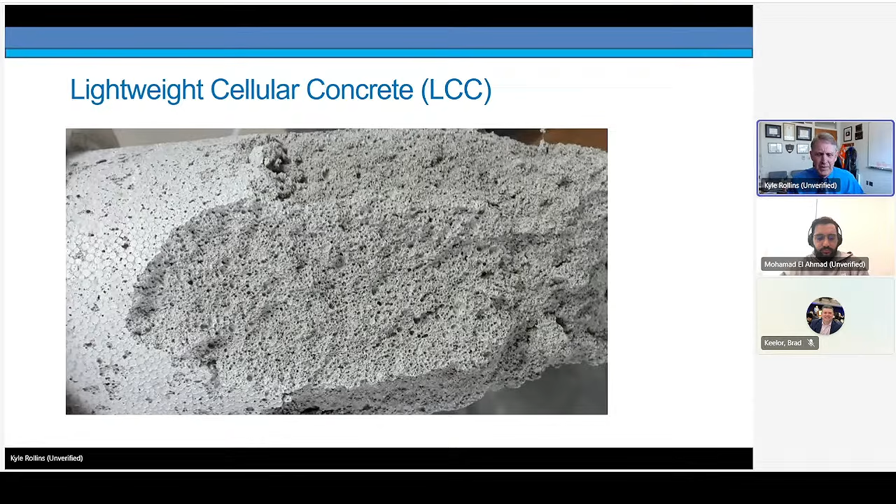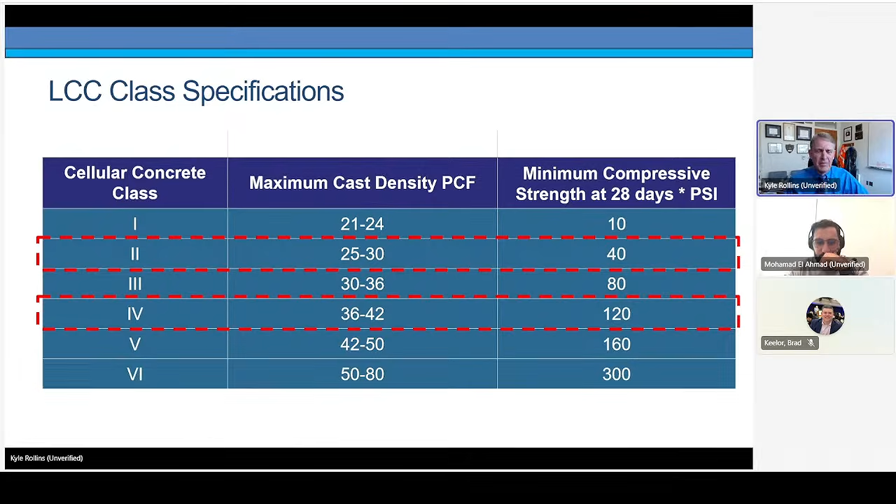There are different classes, and the material we're going to primarily be dealing with is class 2 concrete that has a maximum cast density of between 25 and 30 on average, with a minimum compressive strength at 28 days of 40 psi. Class 4 might also be useful if you're trying to produce a wearing surface that won't be as susceptible to deformation as class 2.

There are a number of benefits for using lightweight cellular concrete, LCC. One, of course, is the lightweight, and this naturally reduces the settlement you have to deal with, particularly where there's critical structures where you're trying to construct. You can also look like a superhero and lift these great big blocks of concrete that only weigh about 20 or 30 pounds, right?

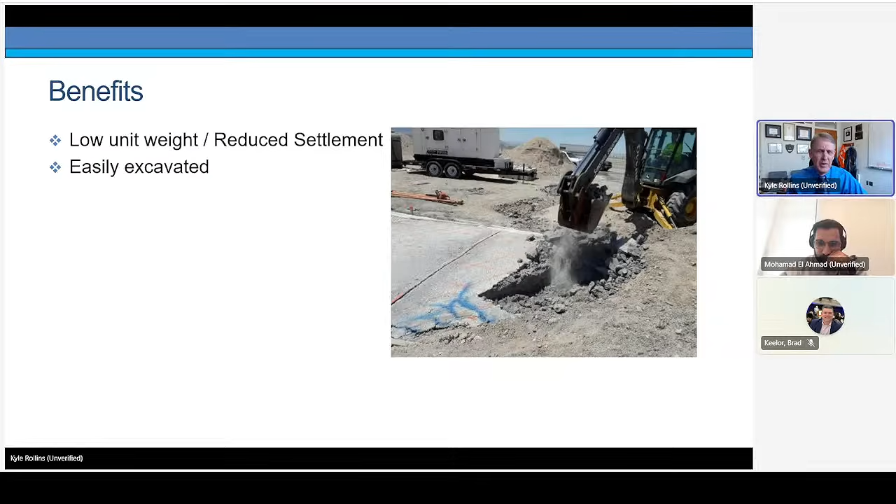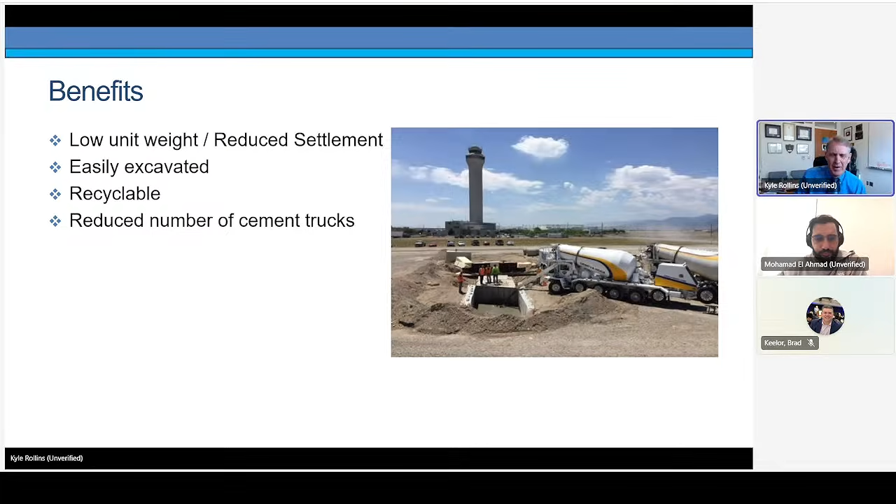Another selling point is it's easily excavated. So if you need to get under that fill material, you can do so with a backhoe without too much trouble. It's recyclable. You can roll over it and it goes back down to cement powder, basically. There's a reduced number of trucks that you have to provide because you're not dealing with all the aggregate that has to go in normal concrete. It's easy to place. You can see how they're pumping it into a project here at the Salt Lake Airport. It has good flowability. It's self-leveling.

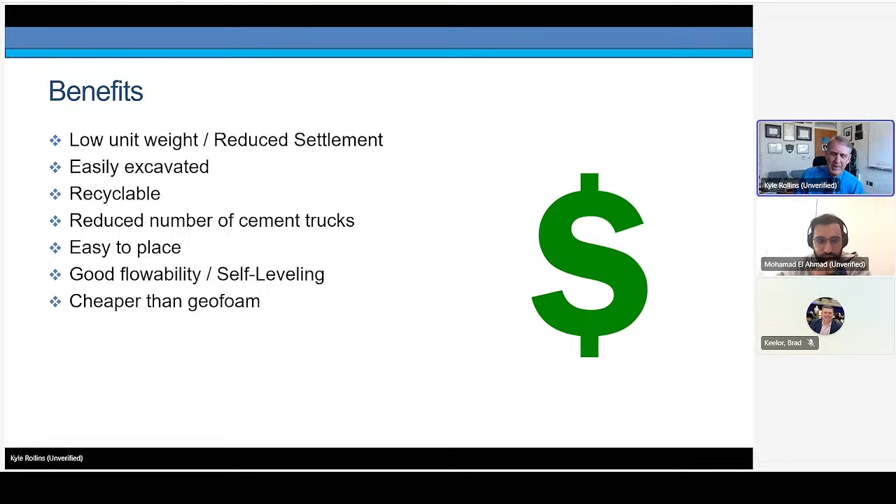And one thing that's important to consider, it's about half the price of geofoam, which is quite a bit lighter, but can often solve a lot of those same problems that you might be looking to deal with.

So there's been a number of LCC projects in Utah. Bangerter Highway used cellular concrete for the retaining structure you see here, and the Point project had a concrete vault that needed to be left open, so they had this retaining system behind it with cellular concrete. That's a block masonry wall. And there's been a number of cases where sliver fills were used to add cellular concrete adjacent to existing roadways with conventional backfill.

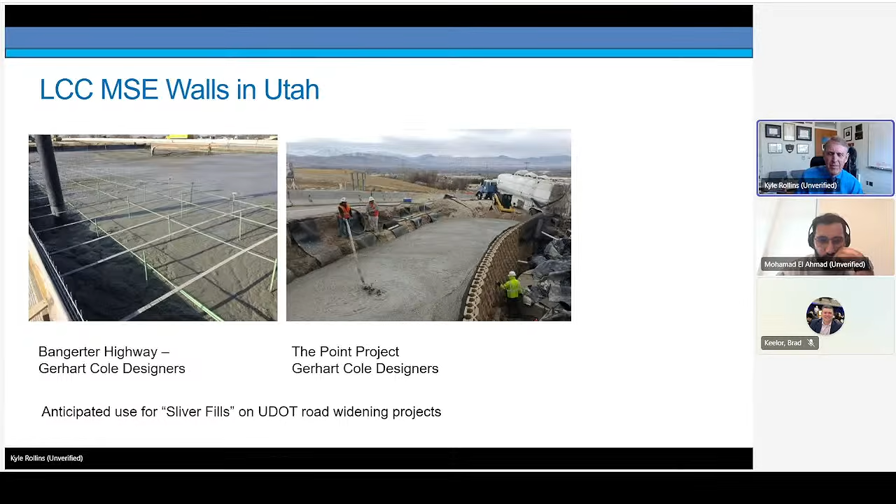Even though we're using it, there's still a lot of questions about shear strength, for example. One approach might say that, well, it's basically a frictional material, so let's use a friction angle and maybe a little cohesion. So some work by Tiwari et al. suggests maybe a friction angle of 34 degrees with a cohesion between 700 and 1600 PSF. So it looks kind of like a normal Mohr-Coulomb envelope for soil.

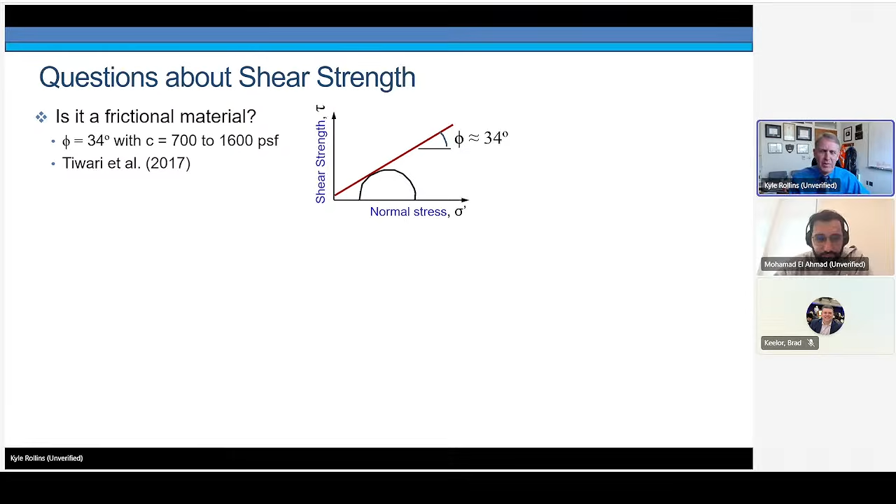Another view is that it's more like a cohesive material, more like a cementitious material. So maybe we could approximate the cohesion as being half of the unconfined compressive strength, like we do in traditional soil mechanics. Or some others would say, let's treat it more like a concrete. Let's use the shear strength of unreinforced concrete, 2 times the unconfined compressive strength to the 1/2 power. So in this case, we'd basically have a constant shear strength with normal stress.

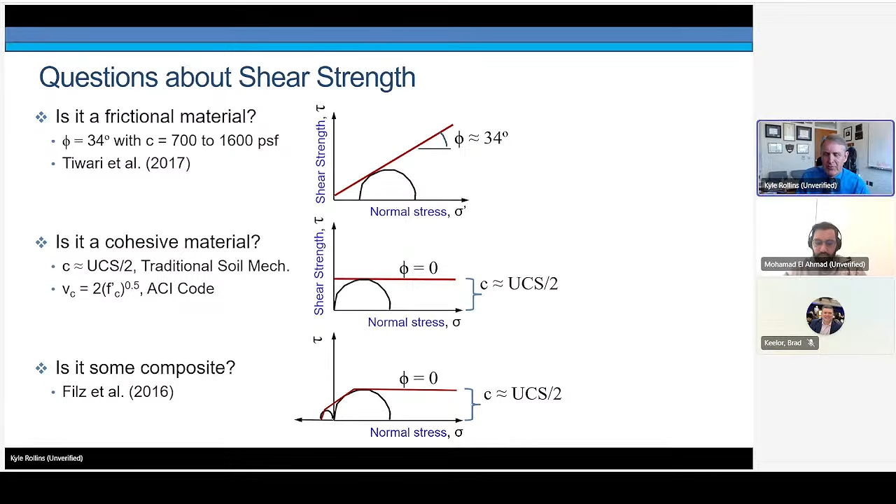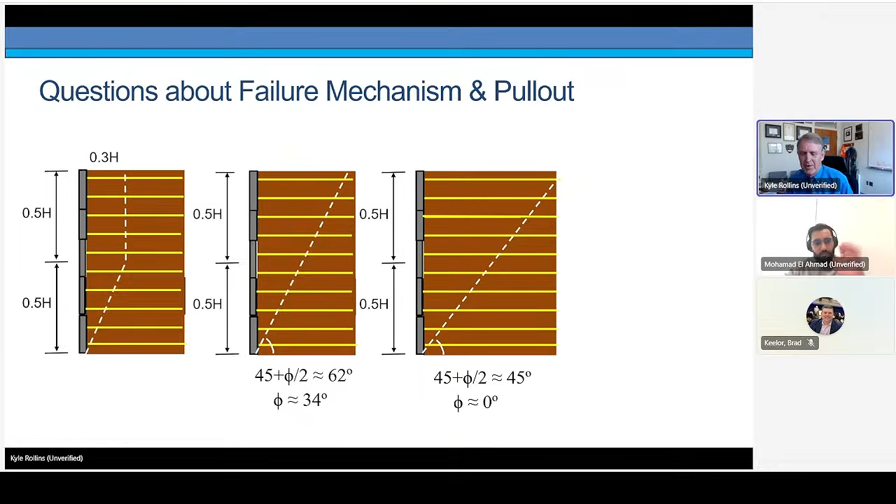There's also questions about the failure mechanism and pullout. So let's think of this. Does the failure surface look like a bilinear shape, like a conventional steel reinforced MSE wall? Is it more like this for an extensible soil wall with a friction angle of 34 degrees? Or is it like this, 45 degrees, assuming that the friction angle is 0? Good question.

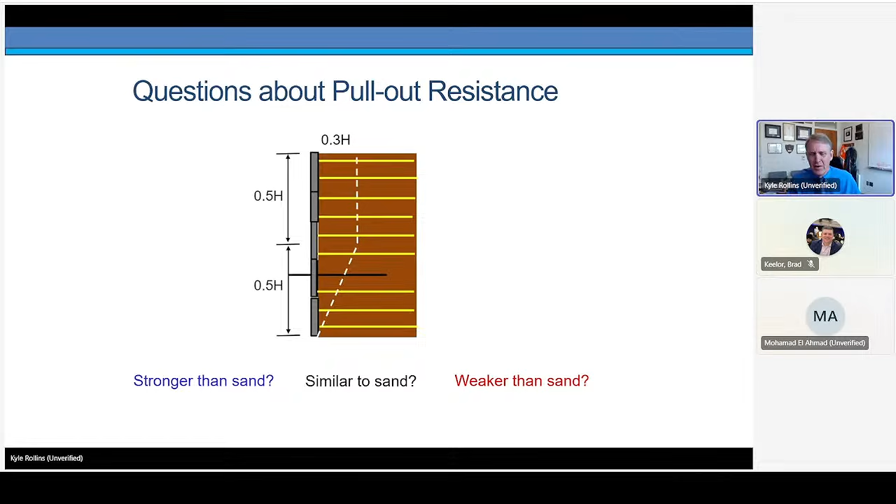And then there's some questions about pullout. If we're pulling on this wall, is the resistance similar to sand? Is it stronger than sand? Maybe it's weaker than sand. So we're kind of operating in the Wild West in some respects here, because people are trying to be more economical with it, maybe taking some risks, others aren't, so we don't know exactly what might be the appropriate thing to do.

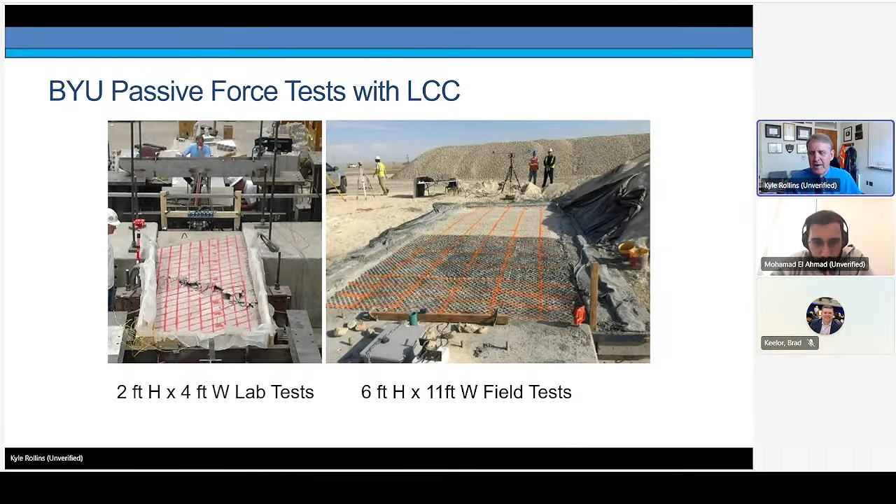We did some tests here at BYU involving passive force behind a bridge abutment. We did some lab tests that were 2 feet high and 4 feet wide. Did some field tests with LCC that was 6 feet tall and 11 feet wide. You can see here out in the field at Salt Lake Airport. And people have back calculated friction angle from our passive force test. To get the best agreement with theory, we need a friction angle of about 34 degrees with a cohesion between 700 and 1,000. And that fits nicely within the range that Tiwari suggested.

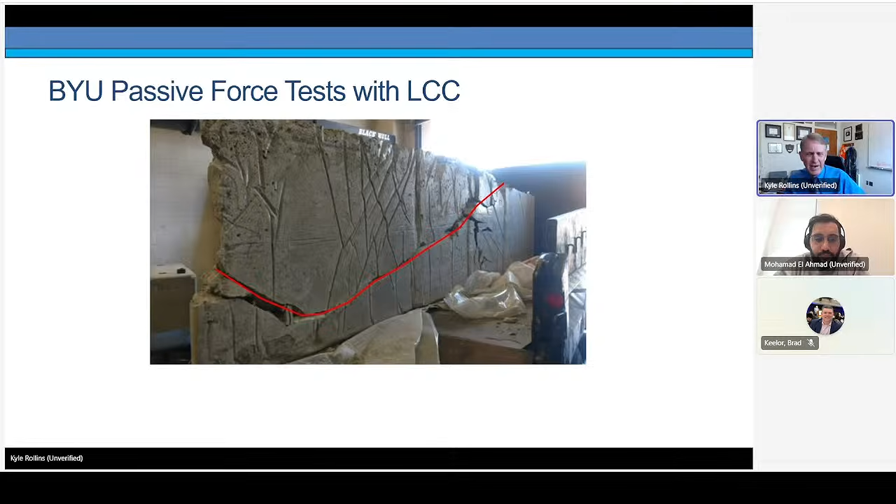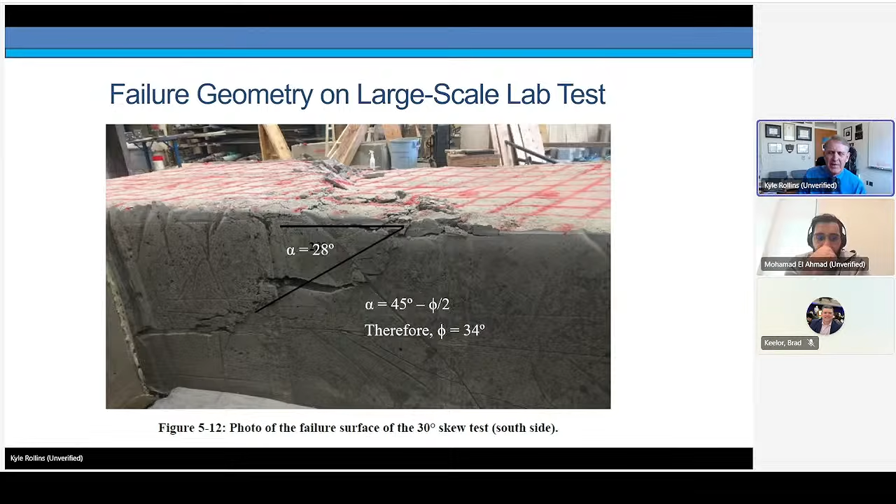We also did the laboratory test that I was telling you about, and this is a side view of the MSE wall, or the lightweight cellular wall, and you can see it looks kind of like a log spiral shape here. And this is another view. And if you look at that failure geometry and consider it more like a soil, you can back calculate the friction angle, and it would be something like 34 degrees here. Okay. So some of the pieces are coming together, but there's a lot of unknowns and uncertainty.

So the objectives of our project were to characterize the nature of the strength criteria based on failure in large-scale tests rather than just very small element tests like an unconfined compressive strength. We wanted to see the failure mechanism that's involved for reinforced concrete cantilever walls, we'll call RCC walls, with unreinforced LCC backfill. We're looking at wall pressures and wall deflections that might develop.

We wanted to do the same for MSE walls with reinforced LCC backfill. We're looking at wall pressures, wall deflections, and induced reinforcement forces in the reinforcement elements. And finally, we're trying to measure the pullout resistance of, in our case, inextensible steel reinforcements at large scale and under variable applied vertical pressures.

So our research approach is always this: one good test is worth 1,000 expert opinions. This is what Wernher von Braun, designer of the Saturn V rocket, said. It's not that we don't value experts. We all want to be experts. That's why we listen to seminars and things like this. It just means that we have to have enough large-scale testing to convince us that things are working the way we thought they were, so that we're not surprised.

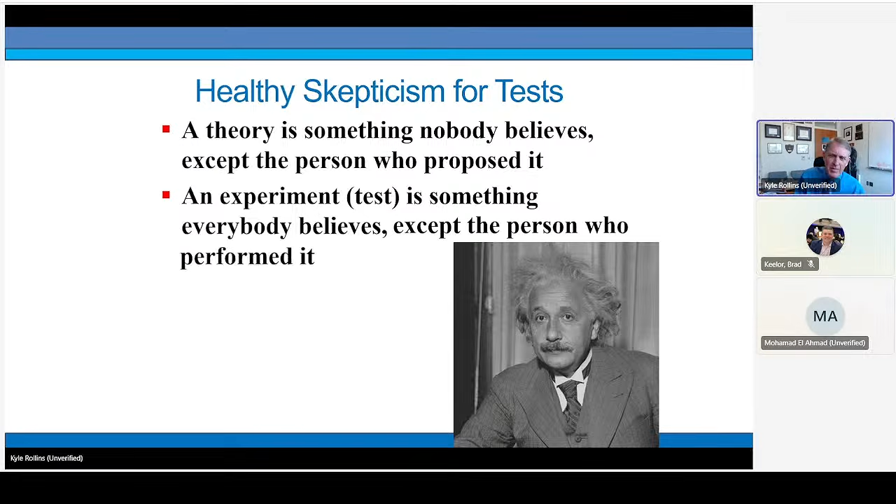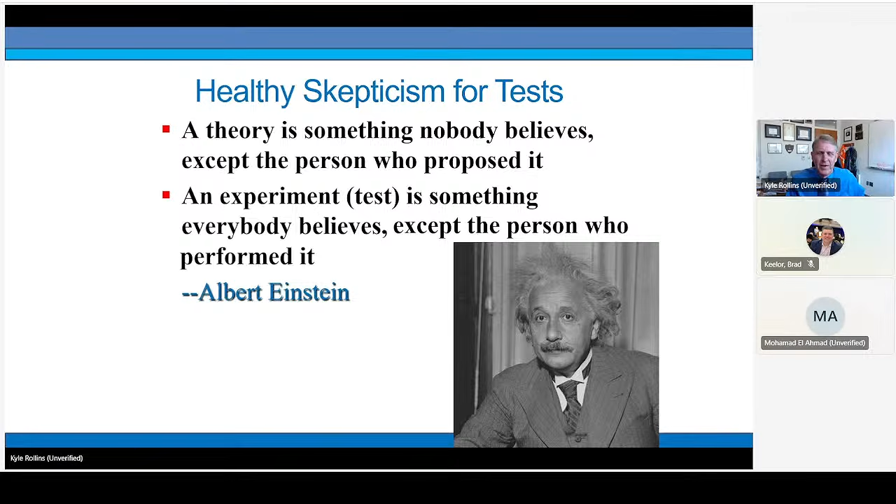Maybe you've had some tests like this yourself, where you're not quite certain that everything was the way you wanted it to be, whether it was compacted properly or whether the strain gauges were working or whatever. So we're going to look at some tests today and see what they can tell us so far.

We had a series of 8 different tests, first 2 involving RCC walls. Then we did MSE wall tests with rib strip reinforcements, one next to a soil slope. Test 5, we had an MSE wall with rib strip, but lower strength of the LCC, maybe around 70 psi. Then we also did some tests with welded wire reinforcement to get some kind of a comparison between the welded wire and the rib strips.

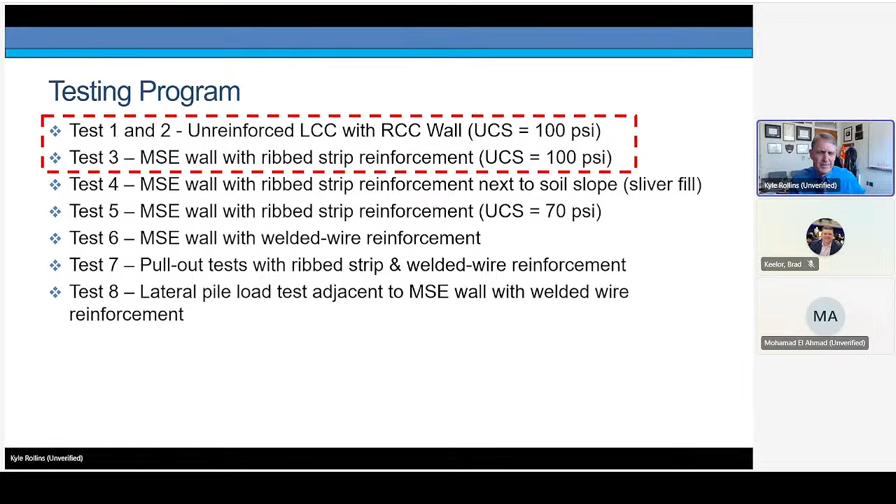Then we did some large scale pull-out tests with ribbed strips and welded wire reinforcements. Lastly, we actually did a lateral pile load test adjacent to an MSE wall with welded wire reinforcements. We're going to primarily talk about these first two tests, but we'll discuss some of the other issues and the performance of the other walls. Oh, I should indicate that we'll talk a lot about the pull-out tests as well.

This is one of our large-scale tests on the RCC wall with unreinforced LCC. Basically, we have a 10-foot tall wall that's 10 foot wide, and on the other three sides shown in red here, we have a steel reinforced frame, and on the insides of those red walls, we have triple layers of plastic sheeting with oil between them to try and minimize the friction on those faces. So we're kind of trying to produce more or less a 2D failure geometry rather than a 3D compressive strength test.

We found out from the first test that it's a much more demanding environment if we only apply pressure on one side. So we first applied surcharge pressure, in this case up to 60 psi, near the RCC wall face. And then we used the jacks on the other six foot side after we'd removed the wall on that back side. So here we're trying to see what the difference might be if we're failing without any wall at all.

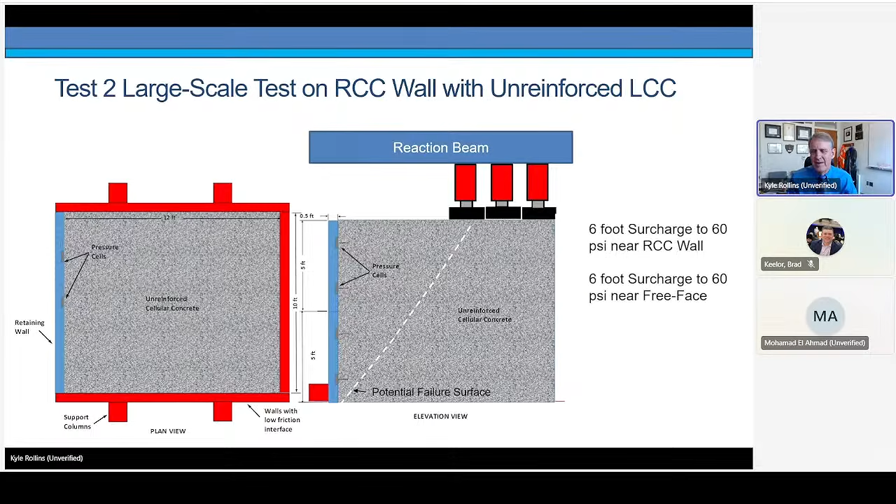Okay. Each one of those jacks pushes on a 2-foot wide concrete beam that's fairly stiff so that we can keep a uniform pressure but allow the soil, the LCC in this case, to fail where it might want to fail. So this is a view of the wall in our structures lab. It has a load capacity of 1.25 million pounds. On the right, you can see each one of those 2-foot wide concrete distribution beams with the hydraulic jack on top of it. So this is quite an undertaking to get this to work.

We had to be careful about it because we knew we were actually going to put these loads onto the fill. We also had digital image correlation cameras that allow us to see the uniformity of the displacement field on the wall face, along with string potentiometers that told us the displacements at the center of the wall.

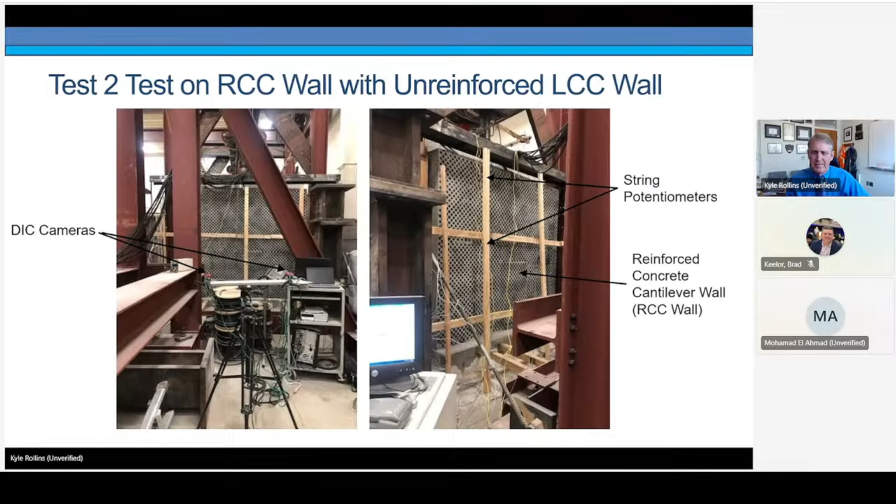So in our first test, we first built a reinforced concrete cantilever wall, like as shown here. It has a stem that's 12 inches wide and a slab that's 12 inches thick. The wall is designed to fail at the base, and it's basically restrained against sliding. So we're not looking at that sliding mechanism. We're primarily looking at failure of the stem. And there's a long heel to prevent uplift and rotation.

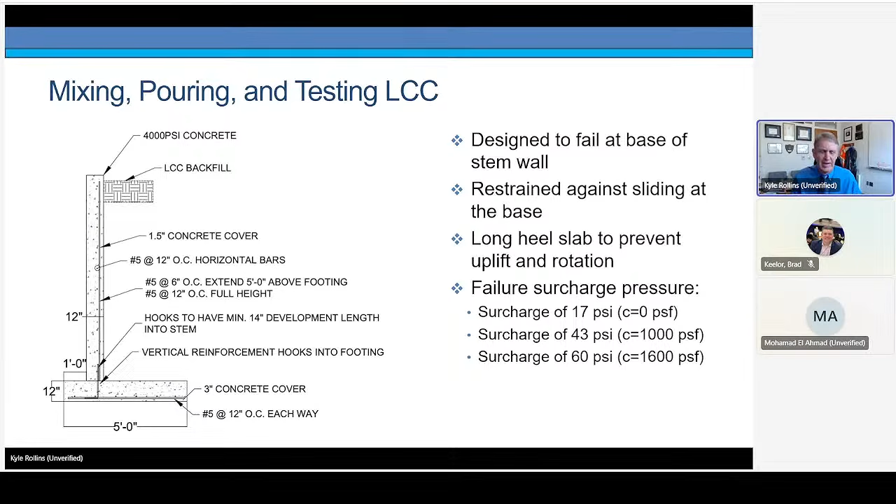So we're expecting failure at fairly small surcharge pressures, maybe 43 psi to deal with the concrete compressive strength, maybe 60 psi to deal with the wall itself. So here's a view looking into the box. You can see the slab and the stem wall. We have pressure plates to measure the pressure that's applied to the wall. And we've got some in-situ pressure sensors and strain sensors. And you can see the plastic sheeting that's meant to reduce friction on the sides.

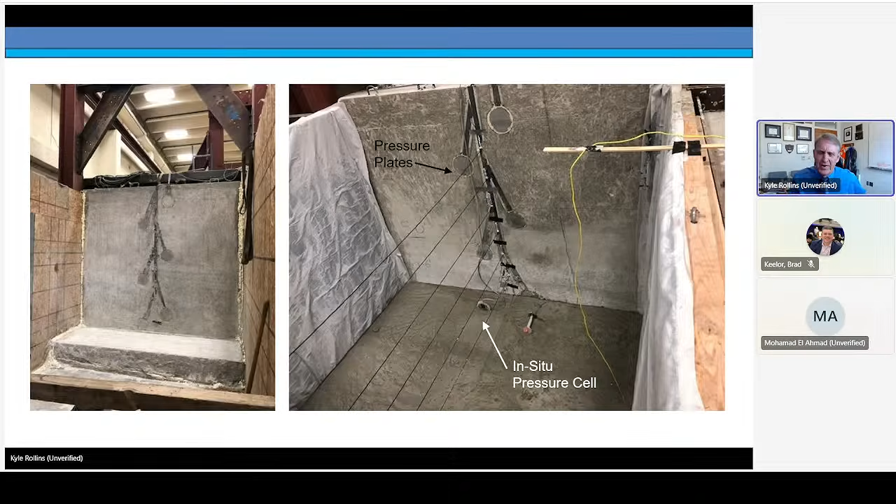The mixing was done again by Cellcrete. Here's one of their rigs. We would mix it a batch, one yard at a time. That would be pumped into our box. The students would take concrete specimens that we could then use for testing. This had a strength of about 100 psi at that test time.

The cellular concrete was placed in lifts that were typically 2.5 feet thick, and then we would wait 24 hours and place the next lift to give the first lift a chance to strengthen. So it was basically 4 days to put this in.

So one thing you find out about LCC is there's quite a bit of variability. This chart here is showing unconfined compressive strength versus dry unit weight. This is from Cellcrete, from their test results, and you can see there's quite a bit of scatter about the mean. Our data points are shown in green and yellow. At 7 days, we're on the bottom end, and at 28 days, we're from the mean to the higher end of the range.

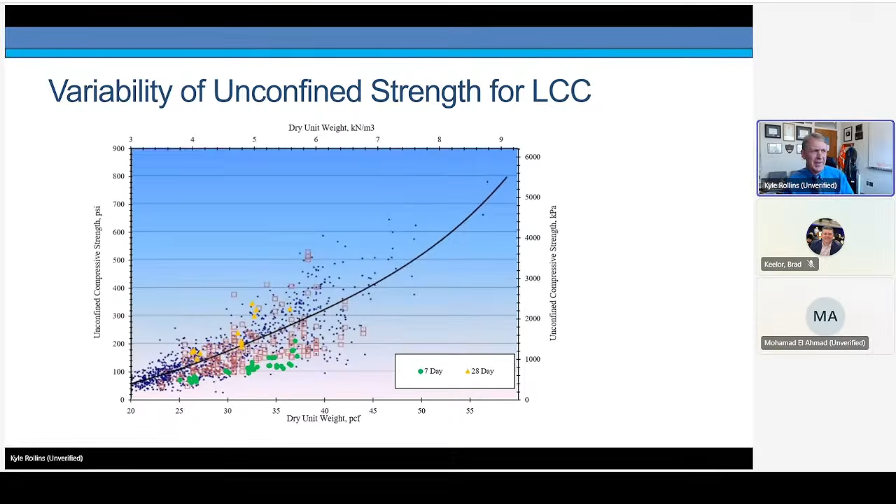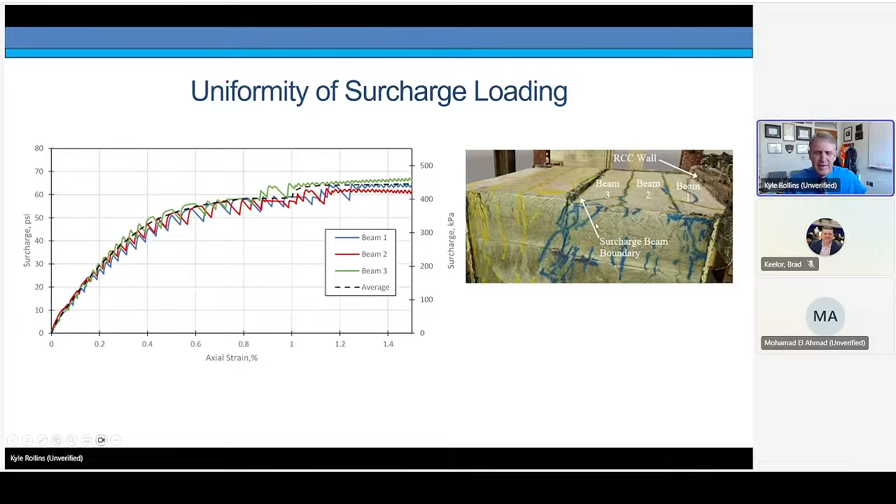We wanted to see how well our beams were distributing the load. So here we're plotting the surcharge pressure versus axial strain for the first beam, 2 feet wide, the second beam, and the third beam. Looking at this, there's fairly good agreement between the pressure-strain relationship being produced by this loading system.

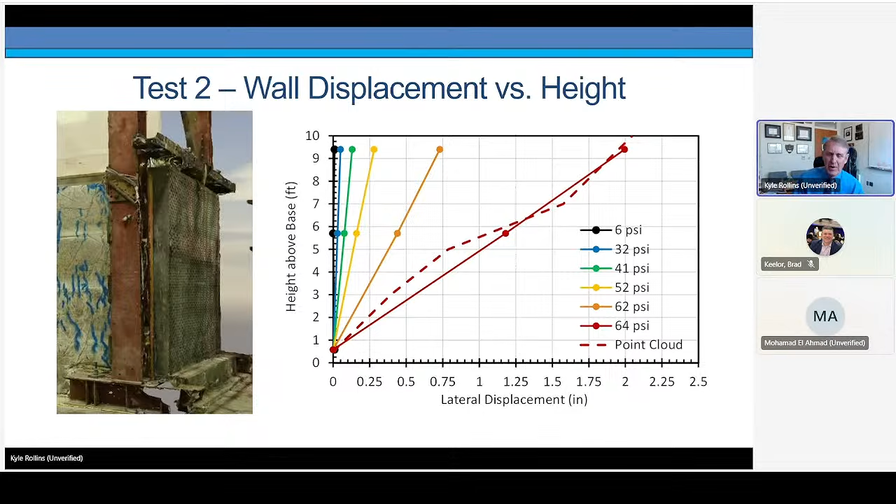When we take the sidewalls off of the box, you can see the cracking patterns that are developed. On the free face side, where we took the wall off, we're getting a fairly steep failure plane. And even though we loaded the top of the LCC back to 6 feet, we're getting failure at about 2 feet in from the face of the wall.

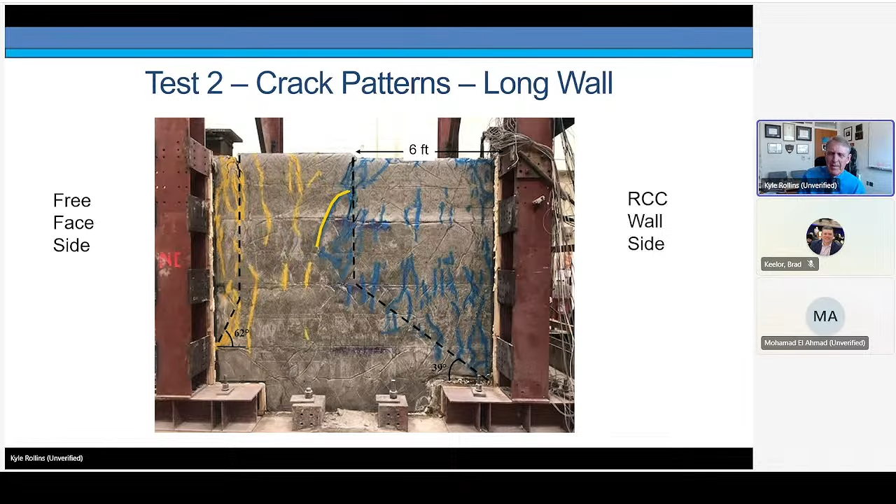For the RCC side on the right, the failure is starting 6 feet back from the wall face, and that was the loaded area. We put in a vertical dashed line down to mid-height, and then another line going down to the base of the top of the slab. Most of the tensile cracking that's taking place is contained within that boundary. So it looks like we've got a bilinear kind of failure situation.

This is a 3D view of the failures obtained from optical means. On the left side, you can see the free face falling onto the side. Blocks of concrete are coming out. And then with the RCC cantilever wall, that wall is holding things in place, allowing that to fail more or less as a block there.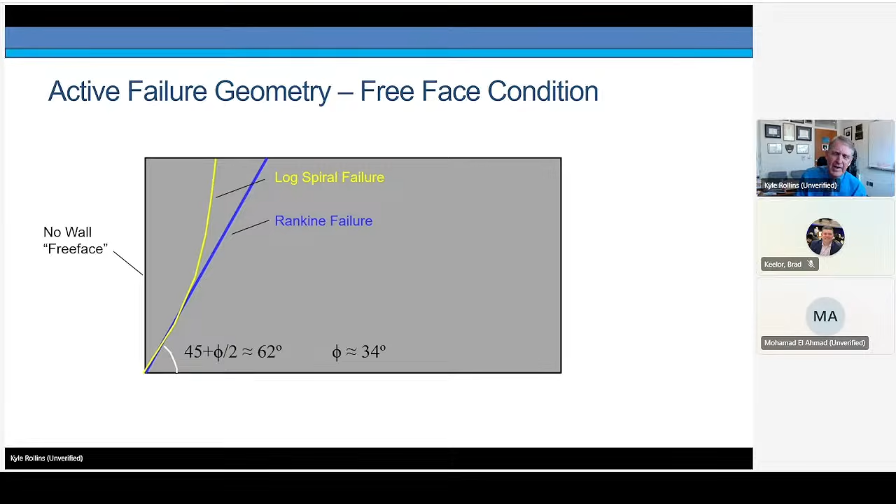If we look at the active failure geometry, where there was no wall, Rankine failure would suggest a linear failure surface inclined at something like 62 degrees if we have a 34-degree friction angle. And we're seeing a variation on that. It looks something like this. So we think the actual failure mechanism is more like a log spiral than a Rankine failure, but it is more like a true active geometry.

Examination of the behavior of this free face wall test gives us a really good opportunity to see how the different failure theories pan out in relation to what actually happened for the free face condition.

One approach would be to use phi-c, using a friction angle of 34 degrees, which is what we used. If we could get a K sub A value, it would be 0.28. We can calculate the contribution to active force as the first term, which is self-weight, fairly low because of the low unit weight of the LCC. Then the surcharge, which is causing a positive force on the wall, resisted by the third term, which is primarily the cohesion. So this is basically Rankine's equation for a C-phi material. Failure would be expected for this case at a surcharge pressure of about 42 psi with a cohesion of 1600 psf. That fits in very nicely with Tiwari's suggestion of using these values, and it's consistent within the range of error of what actually happened.

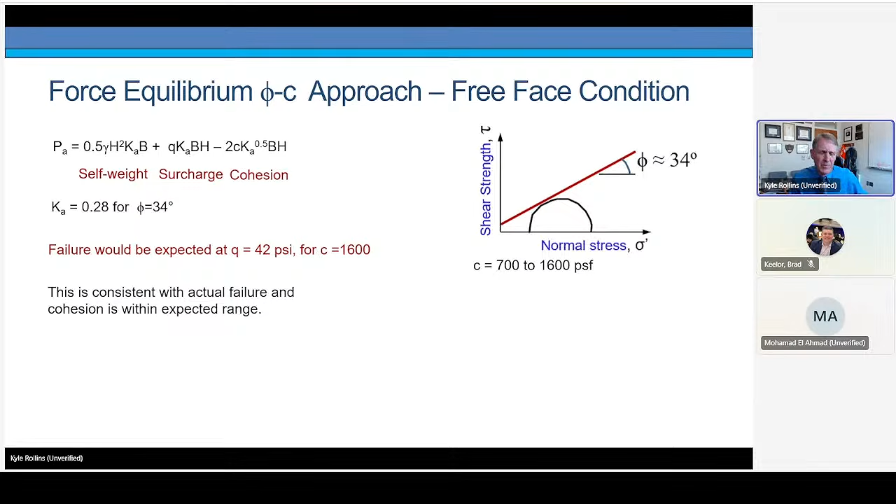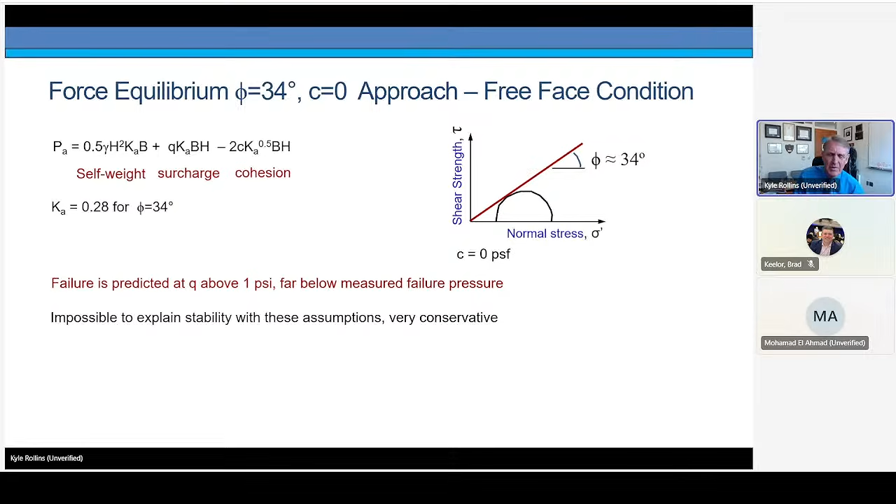Sometimes people assume there isn't any cohesion and use just the friction angle. If we use that approach, we basically get rid of that third term, which is really the main resistance, bringing the cohesion down to 0 but still using the same friction angle. If we were to do this, failure would be predicted when we get the surcharge pressure much above 1 psi. This is certainly far below the measured failure pressure. So it's really impossible to explain stability with these assumptions of 0 cohesion, even though we might use it in design to be conservative. Even if you bumped it up to 40 degrees, you wouldn't be able to explain what happened in the field test here.

Another approach is to use 0 friction angle with a cohesion of 50% of the unconfined compressive strength. In our case, that would be a value of maybe 50 psi. If we do that, we would predict failure would have occurred at a surcharge pressure of 189 psi, almost 5 times higher than the actual failure load we applied. So this approach doesn't seem appropriate—it's going to overestimate our resistance compared to what happened in the larger scale test. To make this work, we'd need a value something like 0.2 times the unconfined compressive strength to get equilibrium in this case.

And that actually works out to be close to the value you would estimate based on unreinforced concrete. So that approach might work.

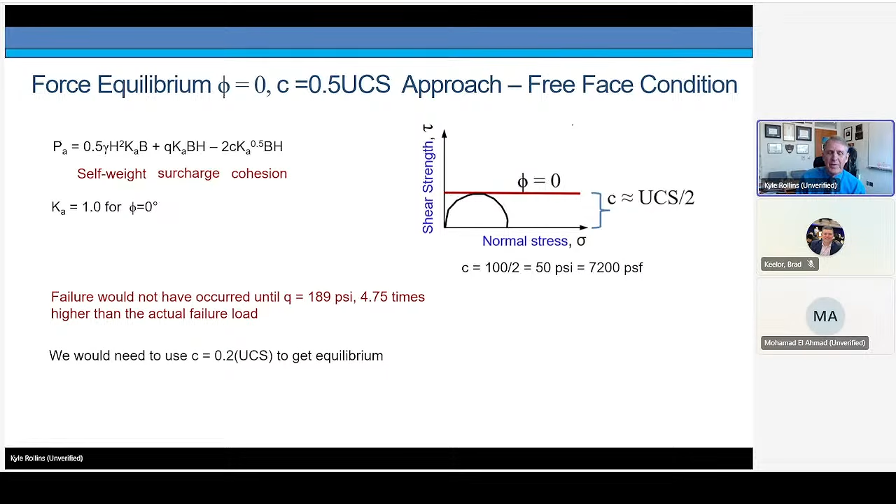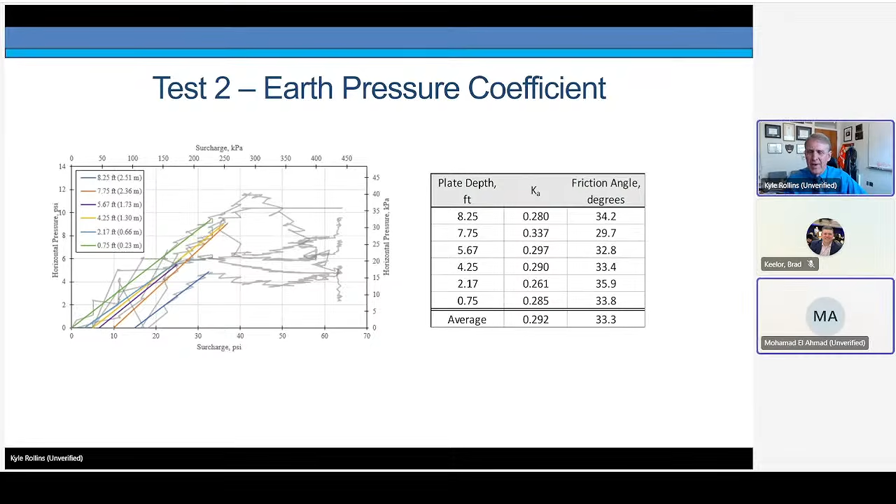We can take all the pressure cells—they have some offsets to begin with, but if we plot the best fit lines of horizontal pressure relative to surcharge pressure, we get a first estimate of K sub A. For those different depths, you can see the variation; the average is 0.29, not far off from what we were seeing. We back-calculated the friction angle for each, and on average it's around 33 degrees—not too far out of line with the 34 degrees we've been looking at.

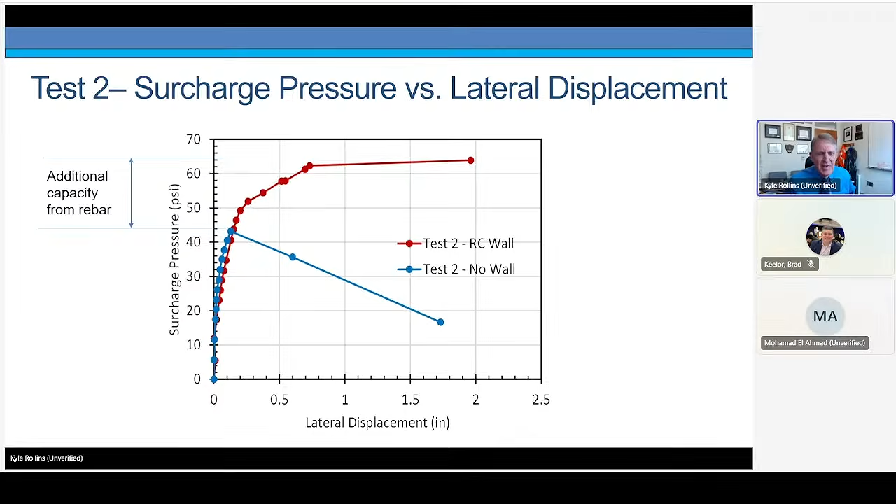We noted earlier that the increased capacity is coming from the failure of the rebar, the moment capacity of the rebar. So we said, let's take a stab at that and see if we can deal with it.

The pressure on the wall is primarily due to the surcharge, and that pressure would be Q times Ka. If we computed the moment produced by that pressure distribution, we'd have 1/2 H as the moment arm, and the force being Q Ka times H, so that would be 1/2 Q Ka H squared.

We can rearrange the equation and solve for the increased pressure Q that we could apply adjacent to the wall to account for the capacity of the RCC wall. For our wall, we had about 34 foot-kips, and the wall was 9 feet tall, so we come up roughly with 20 psi.

If that's the additional resistance we did measure in the field, roughly that—we're in the ballpark with this. That means we could use this equation to calculate the increased capacity of surcharge pressure due to the moment capacity of the stem wall using basic mechanics.

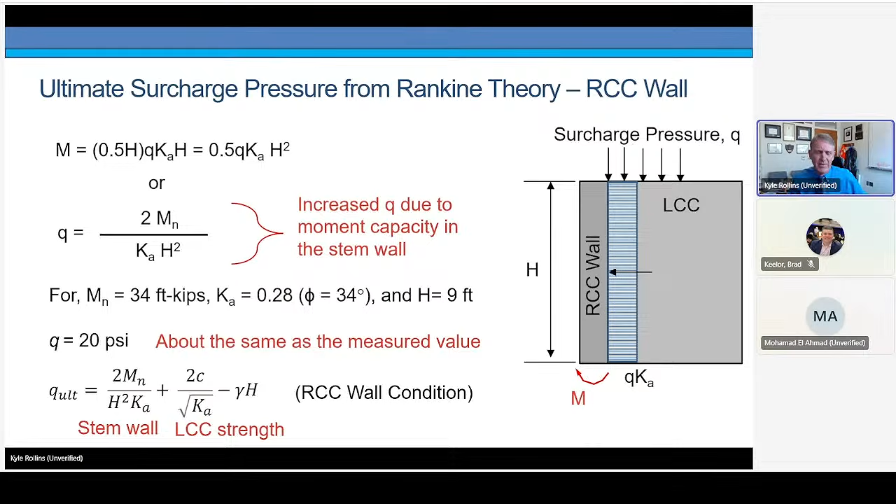Let's move on. This is the second test, the first one that involved the MSE wall reinforcements. Once again we've got a 10-foot tall wall, composed of 2 5-foot tall by 10-foot wide MSE wall panels. Then there are reinforcements distributed across the wall horizontally, spaced at 2.5 feet on centers across the 10-foot width.

Then we eliminated the wall and just loaded the hydraulic jacks on the side near the free face wall, to get an idea of what kind of resistance we'd have with very low reinforcement.

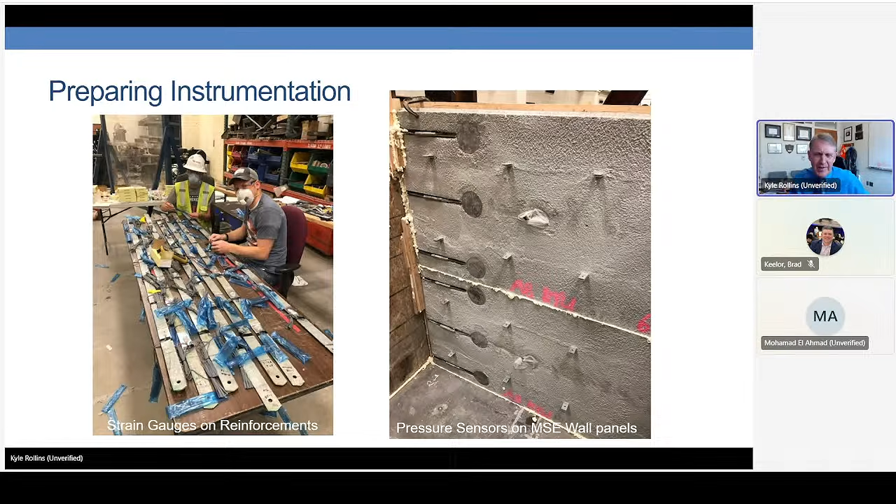We prepared strain gauges on several of the reinforcements, and put pressure sensors on the wall panels to measure pressure there. We tried several different systems—a lot of them had trouble with water getting into the wiring and causing damage. But these plates that were poured flush with the wall survived. I know there's all kinds of uncertainty about that, but it at least gives us something to look at.

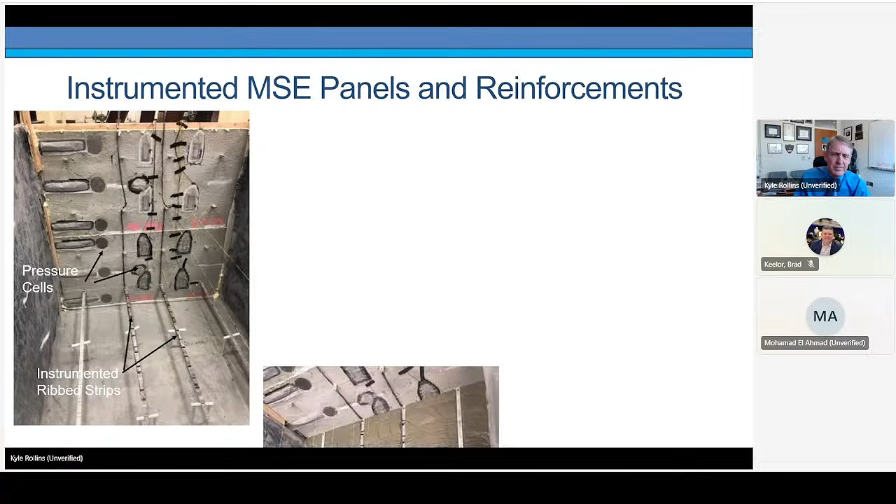This is instrumented MSE wall panels with plastic sheeting on the side, ready for the first lift. Those are the instrumented ribbed strips, pressure cells. And this is the first lift going into the reinforcements covering the LCC. So the reinforcements are located at the center of each lift.

So there's about 2.5 feet of LCC. So that would be poured. We'd wait a day for that to cure. Then we'd come back, place the next level of reinforcing strips, and then pour that in place. And eventually, after 4 days, we get to the surface that was screeded off.

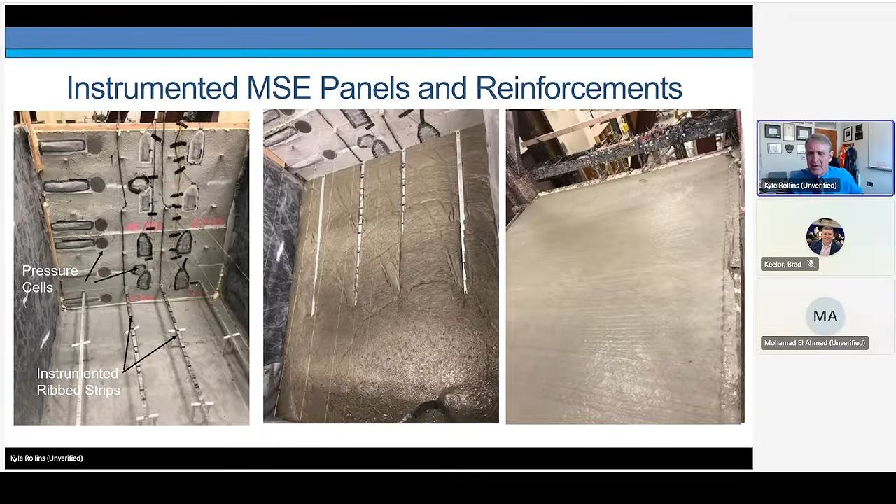This plot shows the axial strain versus surcharge pressure. Once again, the pressure versus strain curves are very similar for the case with no wall and the MSE wall until we get up to about 40-something PSI surcharge pressure. At that point, when we're loading against the free face, the resistance drops off substantially, maybe 1/2 of what it was at the peak, and we start to develop a lot of axial strain.

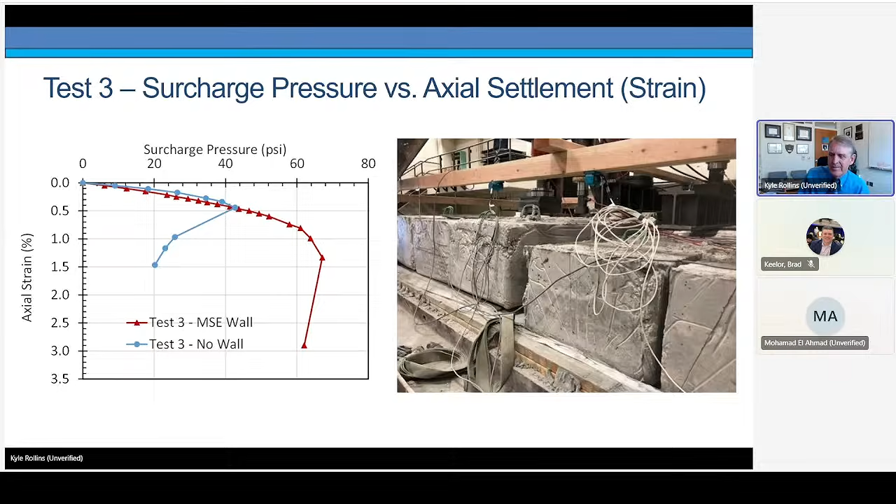Let's look now at the surcharge pressure versus lateral displacement. This is sometimes a more critical issue, but both axial and lateral are important. Once again, fairly similar behavior. We start to deform a little more. There's a break in the curve at about 20 PSI.

At 43 PSI, we post peak, we get a drop off in strength, and the displacement goes up to over 1.5 inches. We stopped the test at this point for safety reasons because the whole wall would have collapsed catastrophically into the structures lab, and we didn't want to damage our sensors and risk hurting anybody. Then the other case with the MSE wall, we can apply again another 20-something PSI surcharge pressure before we get failure.

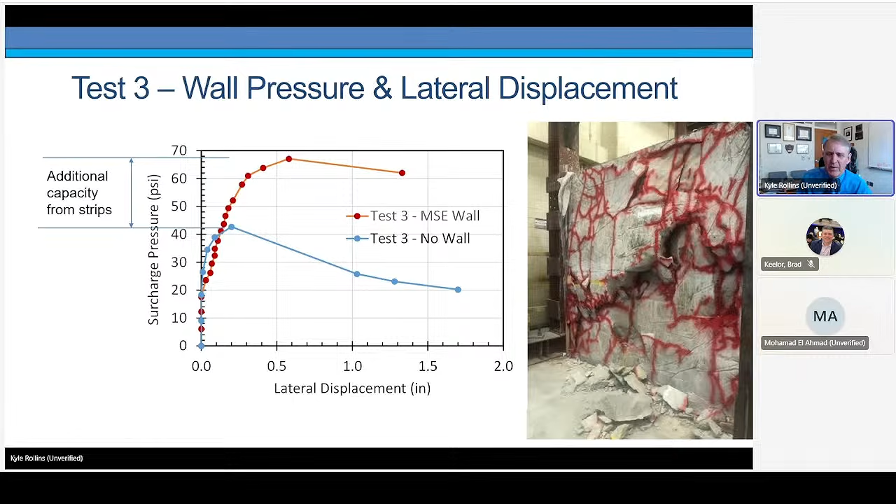So this is a photo of the failure of the free face wall. You can see it's ready to go. These blocks are coming off in chunks. The additional capacity that we're getting from the strips is on the order of 20-something PSI. Again, contrasting the behavior, we have a brittle behavior with no reinforcements and a fairly ductile behavior with reinforcements in place.

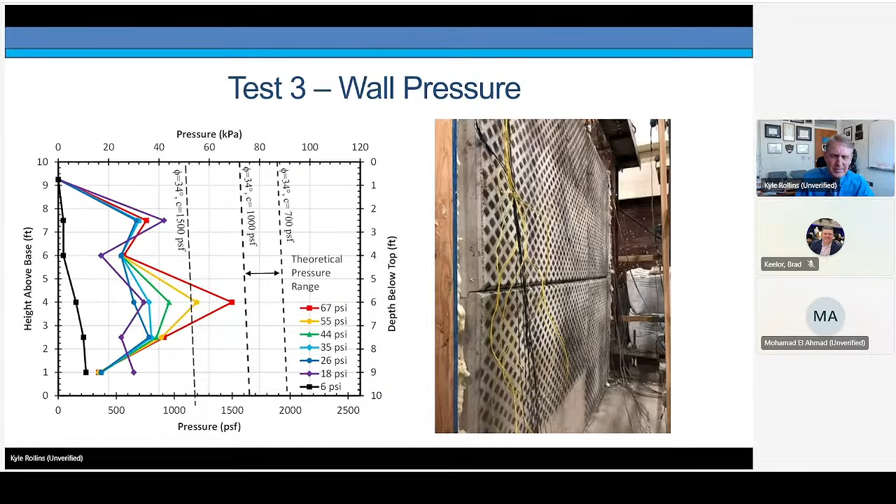This plot shows the wall pressure from the base of the wall, and this is showing lower wall pressures than we saw with the RCC wall. And I think we'd expect that to be the case because the reinforcements are picking up some load that doesn't get transferred to the wall face. If we compare the RCC wall pressures, we're dropping maybe roughly half, except for that one level at 4 feet. So things look like they're behaving like we'd expect. Again, the theoretical values are computed using Rankine theory for c-φ materials.

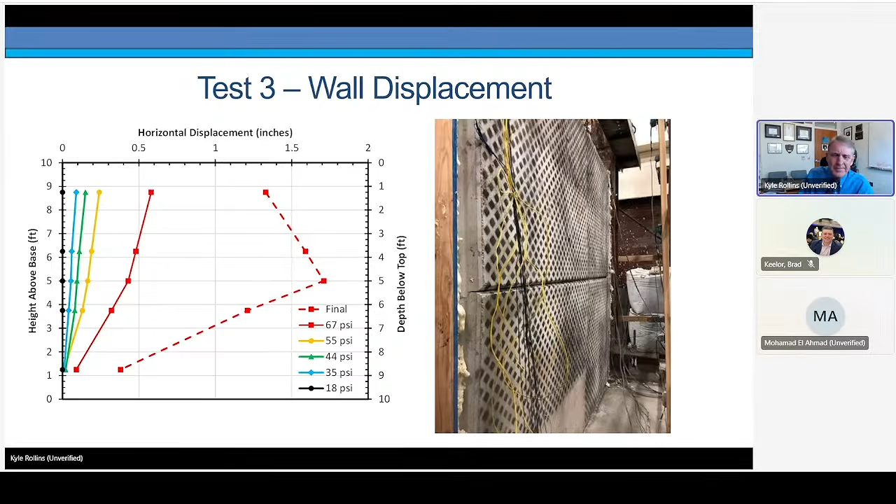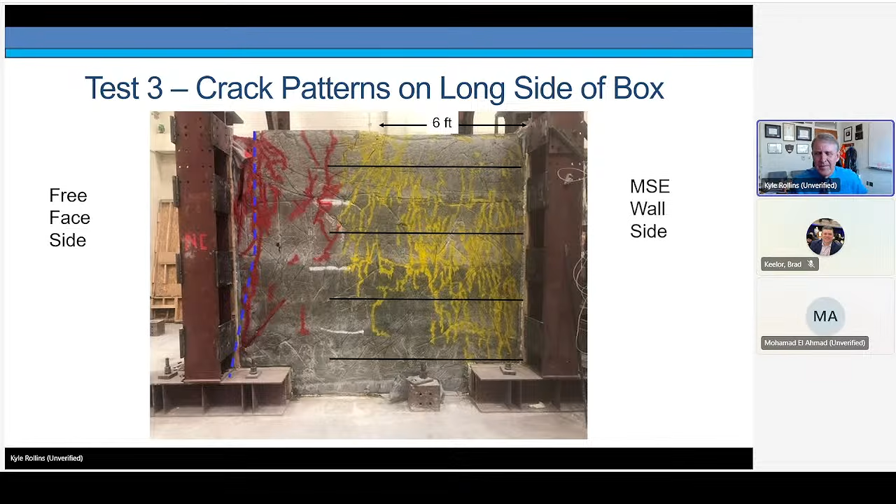Again, here's the free face side on the left and the MSE wall face on the right. The failure surface is very steep at the free face. It starts initiating about 2 feet back, even though we loaded the 6-foot side. And then on the MSE wall side, you can maybe see that there's kind of a bilinear shape to the failure where the cracking is severe, the tensile cracking is developing. So it's more like what you might see for an MSE wall in soil.

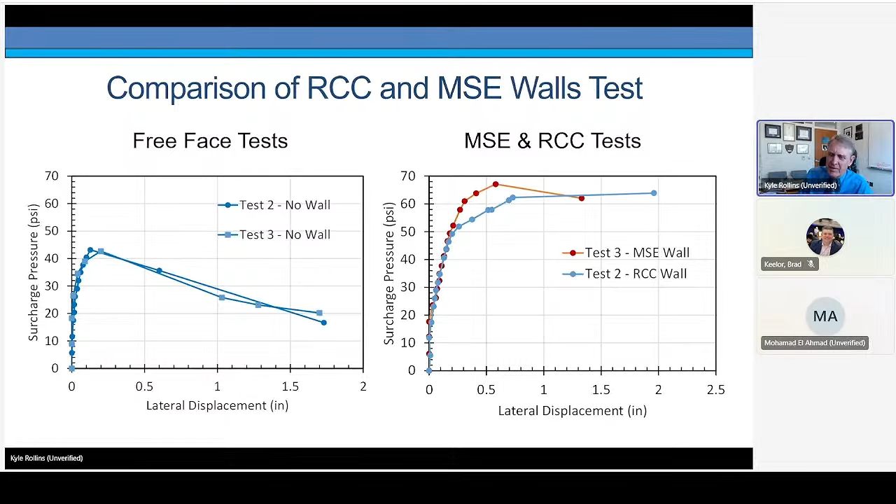And this to me is quite surprising, considering the fact that, as I pointed out earlier, there's a lot of variation in the strengths that we get from the various tests. And even with the sliver fill, we still get a lot of resistance, similar resistance with a wall that has lower strengths. We're still getting a good behavior.

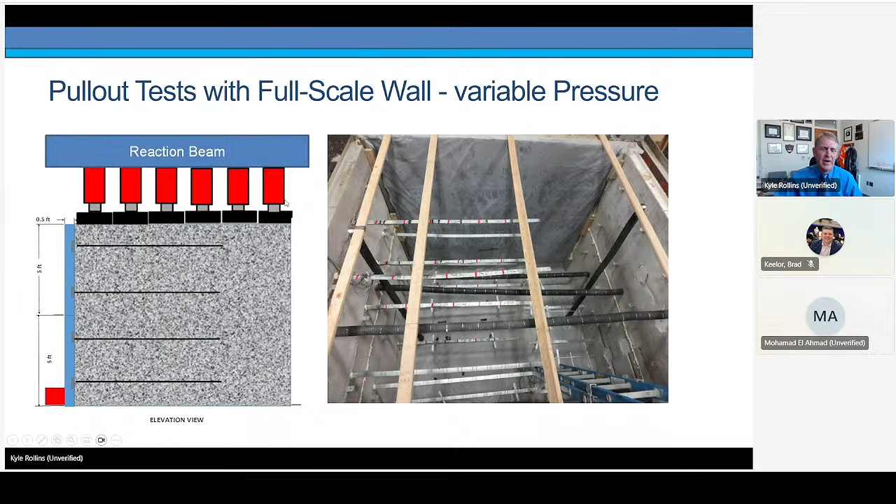So we're going to look now at pull-out resistance testing. We had this system in place so that we could do pull-out tests in one of the situations where we had different reinforcements in place. And we loaded the entire area uniformly and then pulled the reinforcements out through holes in the retaining wall or the wall panels. So we had some with rib strips and some with welded wire. Again, we pulled them out through these holes.

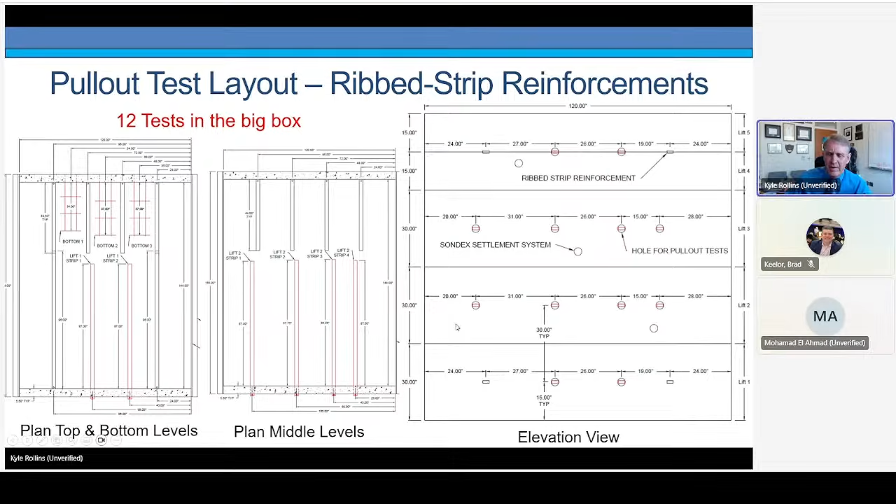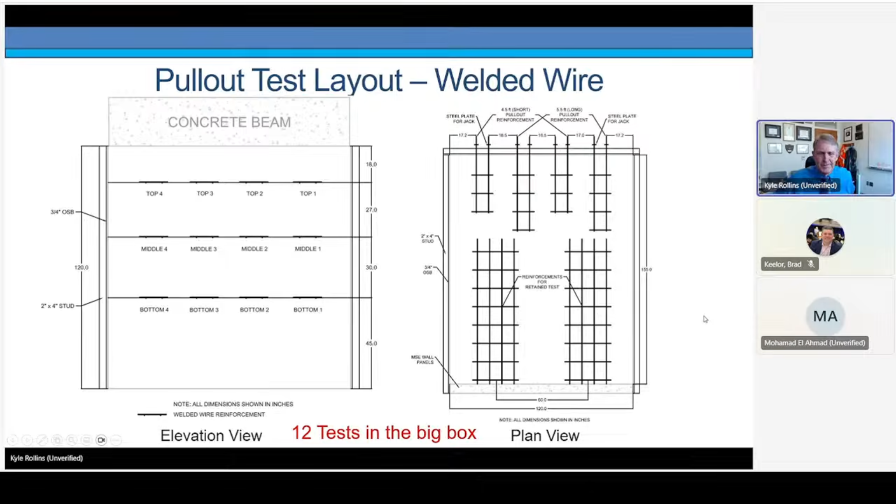These are load deflection curves for the rib strips. You can see that they tend to reach a peak at fairly small displacements, in some cases a tenth of an inch or maybe a quarter of an inch, and then there's a tendency for this to drop off. When that would happen, there was a big popping sound. We suspect maybe this is where we're losing some of our cohesion, and maybe the friction is taking over.

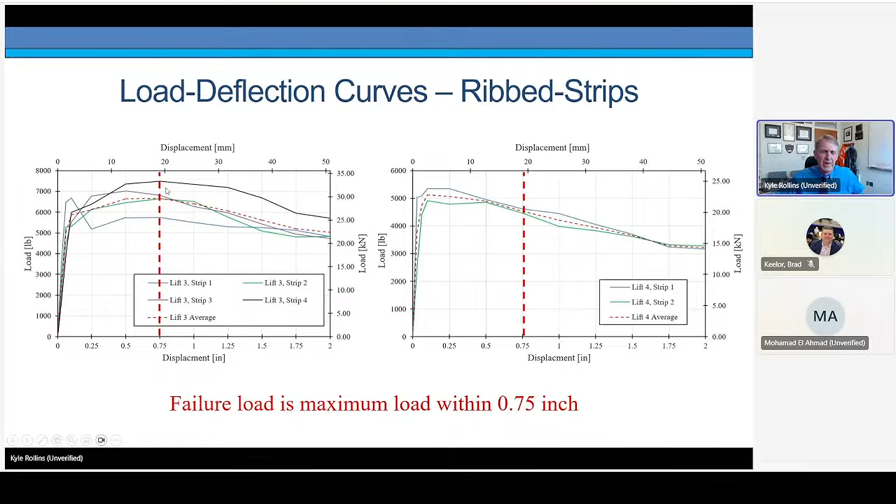We picked our resistance as the maximum value within 0.75 inch of displacement, right? So we would have picked this value here. We'd have picked this value here for the rib strips.

In contrast, with the welded wire reinforcements, as we're loading them up, we get even more resistance as we displace the reinforcement. And at our value that we're picking off as our maximum here, within 0.75 inches, we haven't developed the full resistance for the welded wire. And for this maximum, we might have an additional 40% resistance if you wanted to allow that kind of displacement to take place. We're trying to limit the displacement, so we use this value.

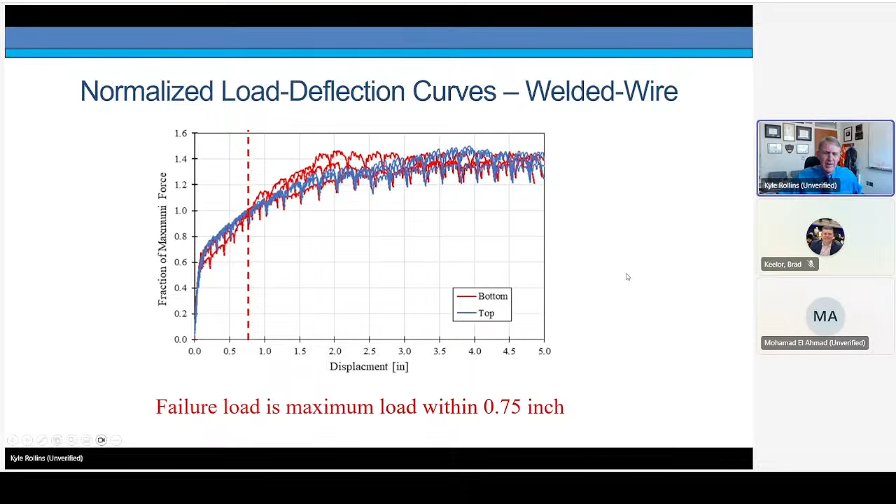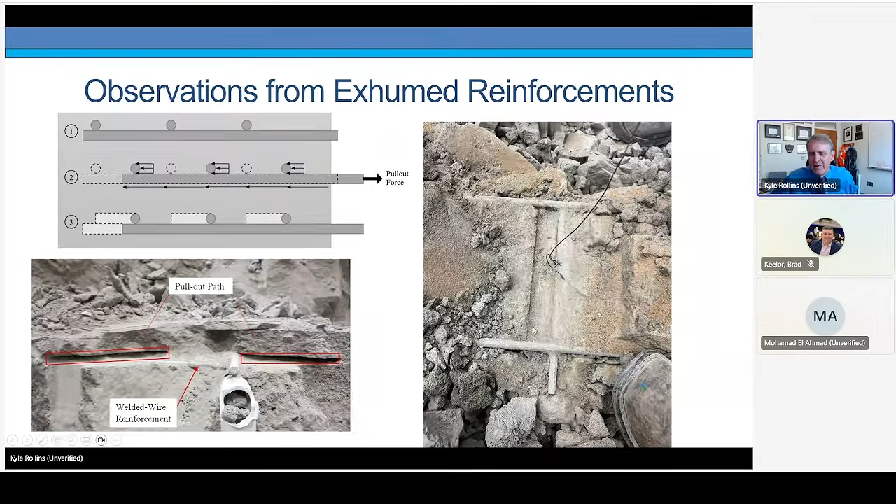We exhumed the reinforcements, and you can see that here as we pull on this longitudinal bar, the crossbars develop passive resistance on their face, even though we're treating it as a frictional thing, and a gap forms. So as we're pulling this way, you can see the gap that forms in the LCC behind that crossbar. After exhuming it, you can clearly see that bar is pulling to the right, and we basically pulverized this material behind it.

For the reinforcements, they start out looking like this. As we pull out the rib strip reinforcements, in a number of our cases, it looks like there's still some LCC adhering to the reinforcement as it's being pulled out.

As you can see again here, we back calculated our apparent friction coefficient, F star, for pullout using the maximum pullout resistance within three quarters of an inch, or within 0.75 inches. We divide it by 2 times the width and the length and the vertical stress that we have the reinforcement under. And we're assuming that all the pullout resistance from this equation is frictional, but it's really an apparent friction because some of it's coming from passive resistance as well.

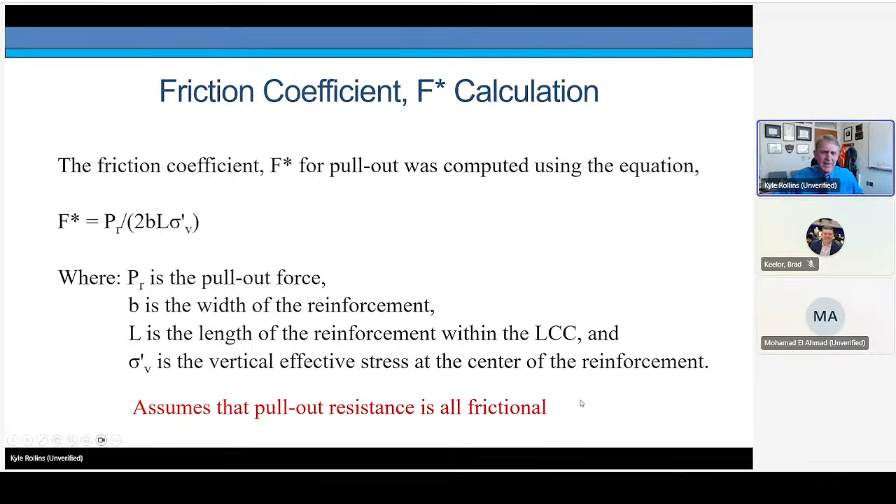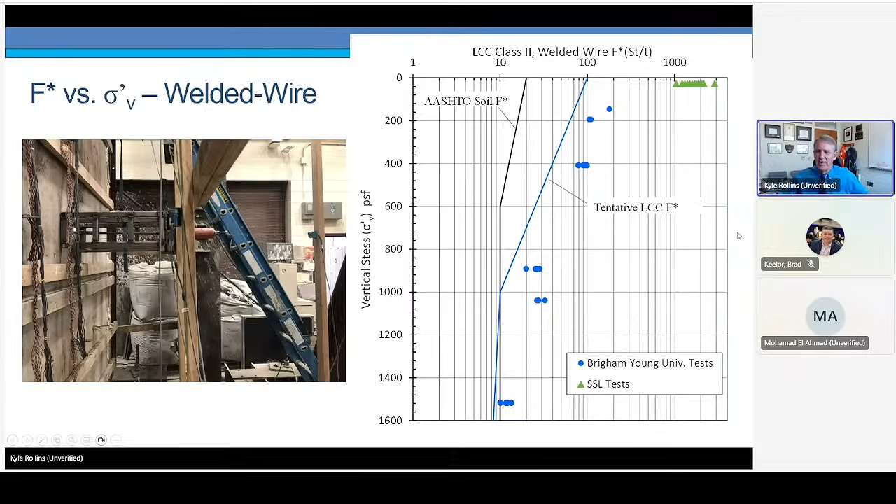Okay. We did something similar with the welded wire reinforcements. These are the welded wire reinforcements. I think I've got a slide out of place here, but these are the welded wire reinforcements. I think the first one should have been for rib strip reinforcements.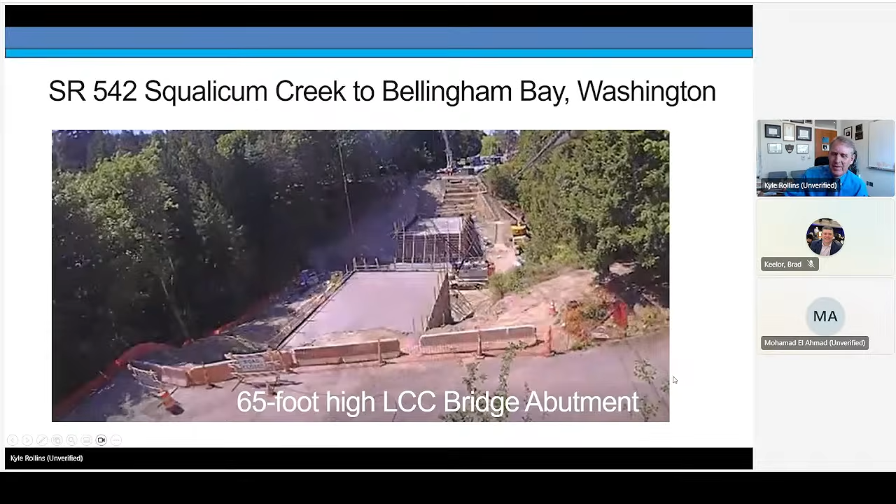Now we thought, are we high enough in pressure? And we thought, well, sure, we're high enough for a 50-foot wall maybe here. But if you think of the condition we're loading in our lab tests, our pressure is going to be a lot higher than that. It might be up to 1,000 PSF, and our tests just don't extend to that level. So we went back and realized also that if someone builds a bridge abutment out of LCC like the WSDOT people are doing in Washington State, which is 65 foot high, and it's going to be supported on a slab footing here, you could have some fairly substantial values of pressure.

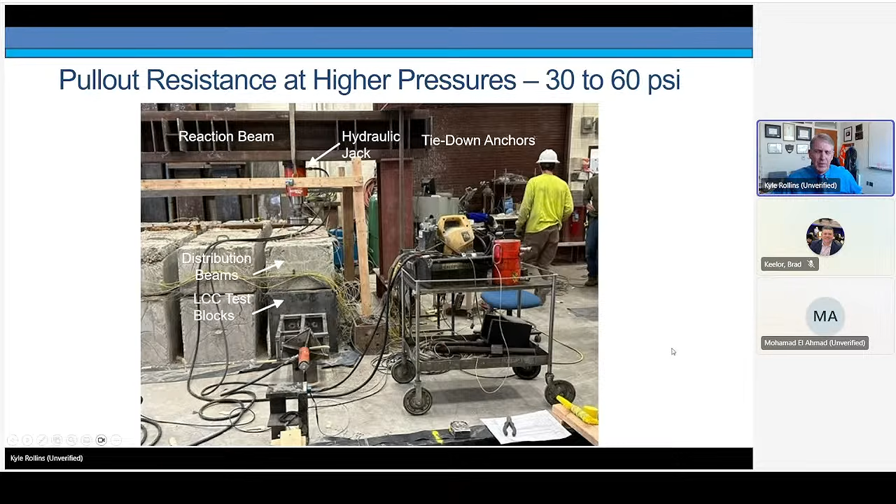So we went back in and put some additional blocks. Here's our reaction beam with tie-down anchors. This is the hydraulic jack. It's applying pressure to the distribution beam to distribute the pressure across here. And this is our LCC test block that we're pulling the reinforcement out of. So we did some additional testing at higher pressures from 30 to 60 psi.

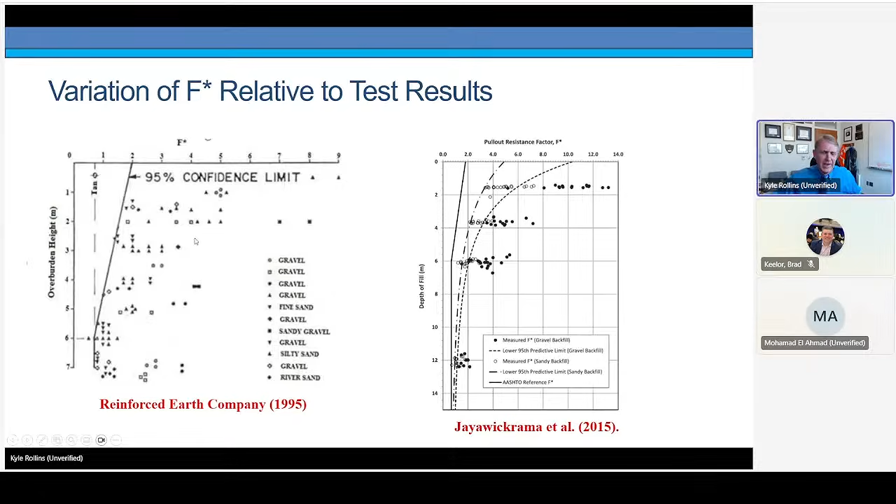Now, when we look at F-star values, we tend to go at the very low end of the range. This is some results plotted by Reinforced Earth Company. This shows a comparison of AASHTO values with some tests at Texas Tech, I believe. And there's always a large variation in the pullout resistance factor that's back calculated, but it decreases with depth or pressure. But typically, we're going to use a value near the lower end of the range. And so that's what we decided to do here, is come up with a value that would go through all the range. And these last three are those higher pressures that we developed.

Okay. And rather than doing different straight line segments, we've used just an equation that is applicable all the way through it. It's kind of at the low end of the range of materials we've tested. And here's the welded wire, another equation for it that's doing a fairly good job of bounding the low end of the results.

Last thing we want to look at is MSE wall stability without reinforcements. We wanted to do this using slope stability methods, and then use the same properties that we back calculate there in analyzing the behavior with the reinforcements. So we used Stephen Wright's program, UTexas 4, which he, of course, recommended in his lecture. I think it was a Seed lecture several years ago, because it has the ability to handle this properly.

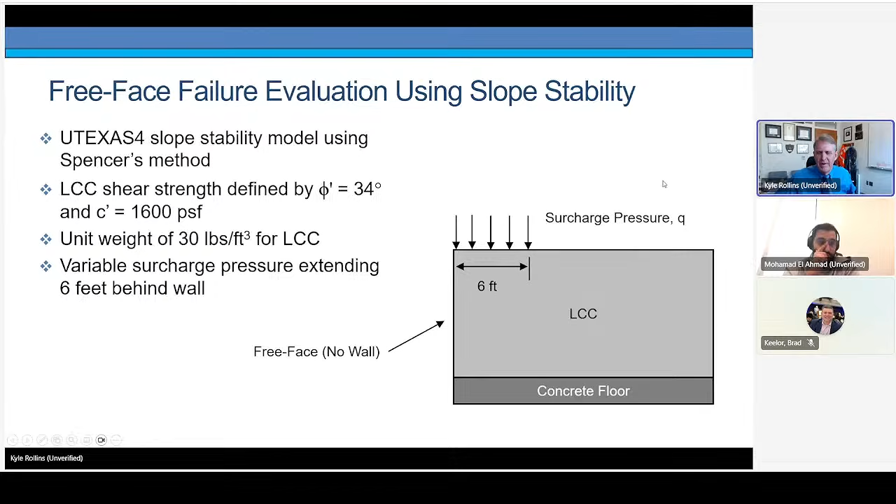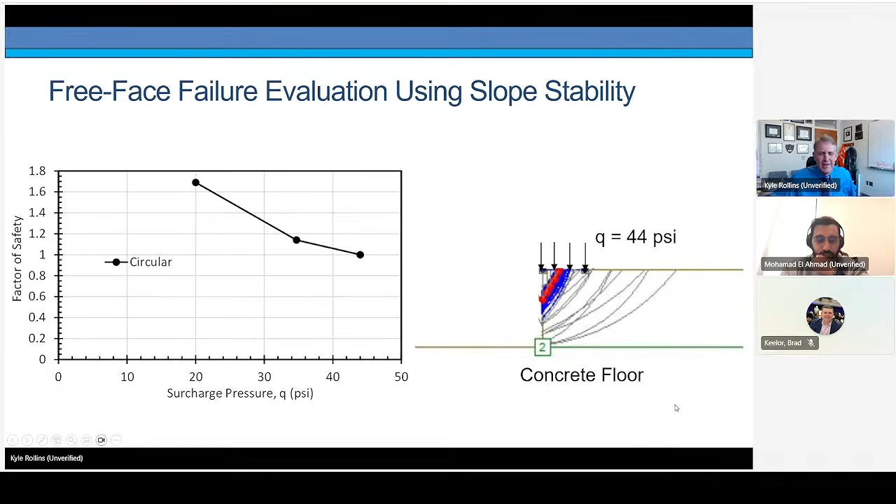We used an LCC shear strength defined by a friction angle of 34 degrees, and we used the cohesion of 1600 PSF that we'd found from force equilibrium. We used a unit weight of the LCC of 30 pounds per cubic foot and applied this variable pressure on the surface of the model. Then we started increasing pressure, and to get failure, we have to increase the pressure to about 44 psi, which is what we measured in the field. And these are the critical failure surfaces for that case, and it agrees reasonably well with what we saw in the test. So that gave us some confidence that this might be a valid approach.

We had 4 different tests where we had a failure of the free face. And for each of those, we used a friction angle of 34 degrees. There's some differences in unit weights, differences in unconfined compressive strengths. And we back calculated the cohesion it would take to have a factor of safety of 1.0.

So this is the range, a lot of them in the 1600 to 1700 PSF range. This one test where we had some lower strength concrete was in the 1200 range. So somewhere between 1200 and 1700 PSF was our back-calculated cohesions.

Then we went to analyze the wall stability with reinforcement. So we use the same slope stability model with Spencer's method, which satisfies both force and moment equilibrium and is designed to deal with reinforcements. We used the back-calculated values from the free face tests with the appropriate unit weights, and then the pressure on the wall that was involved.

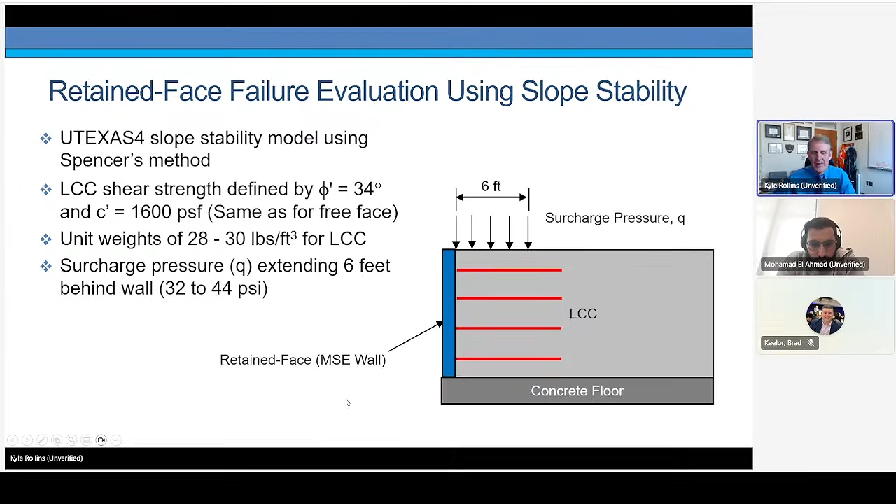And in back-calculating this from the reinforcement, we got an equivalent force for a 1 foot wide strip. We distributed the reinforcement that we had linearly across the strip. And then we kept all the LCC properties the same as back-calculated from the free face test. So all we did was adjust the F-star value until we got a factor of safety of 1. Of course, as this fails, for any failure surface, we're only taking the tensile force at the back end of the reinforcement.

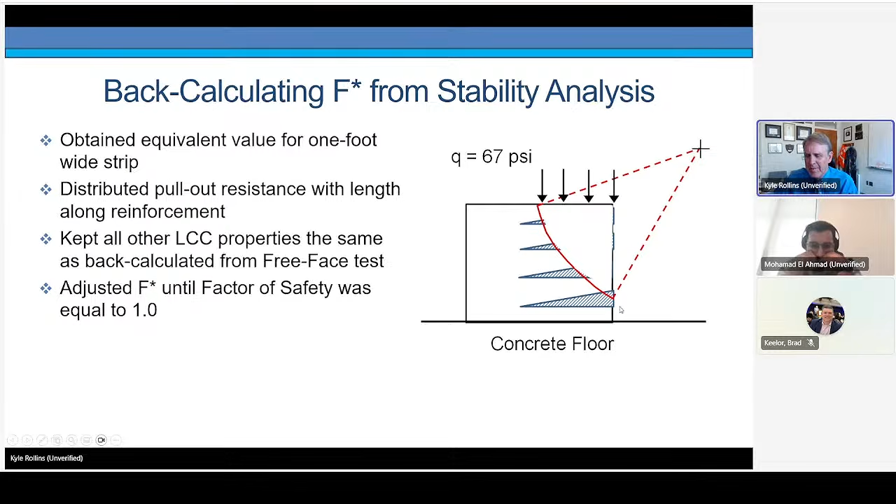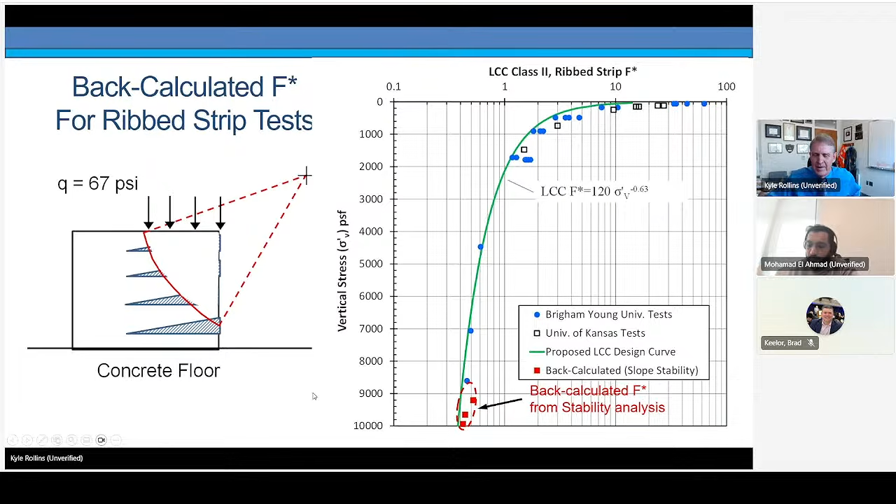So if we do that, I'll show that slide again that showed the pullout resistance in our bounding curve. Here are the back-calculated F-star values using the slope stability model. And the back-calculated values are in very good agreement with what we got from the pullout tests here. It's 3 tests that we're looking at there.

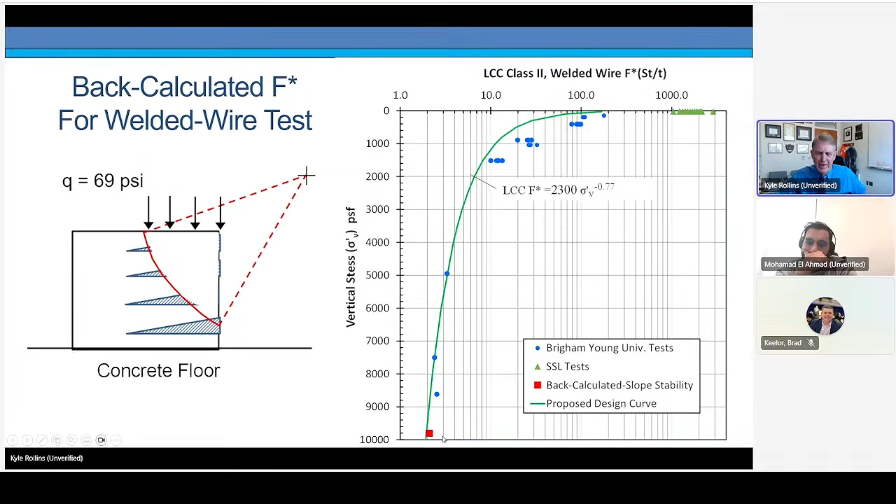And then this case involves welded wire reinforcement. So I'll put the curves up for the welded wire. And this point comes in very nicely with the results from the pullout tests that we've done previously. So that was very satisfying after finding out that we couldn't get it to fail if we were using values like we were seeing up here at lower confining pressures.

So let's summarize here and note that both the MSE and the RCC walls with LCC backfill can withstand significant surcharge pressures with limited axial and lateral deformations, in the order of 50 psi. Failure occurred at surcharge pressures of 62 to 67 psi when the UCS, unconfined compressive strength, was around 100 to 120 psi. The MSE and RCC walls significantly increased the failure load in comparison with LCC with no wall in place and produce much more ductile load deflection curves.

If we look at the free face failure situation, the LCC strength was best predicted using a C-phi model rather than taking half of the unconfined compressive strength. There's a possibility that we might be able to use the shear strength of concrete for unreinforced conditions. But using UCS over 2 didn't work very well. The earth pressure with the RCC was consistent with what we'd expect if we used Rankine theory with a cohesion of 1,000 to 1,500 PSF, for example.

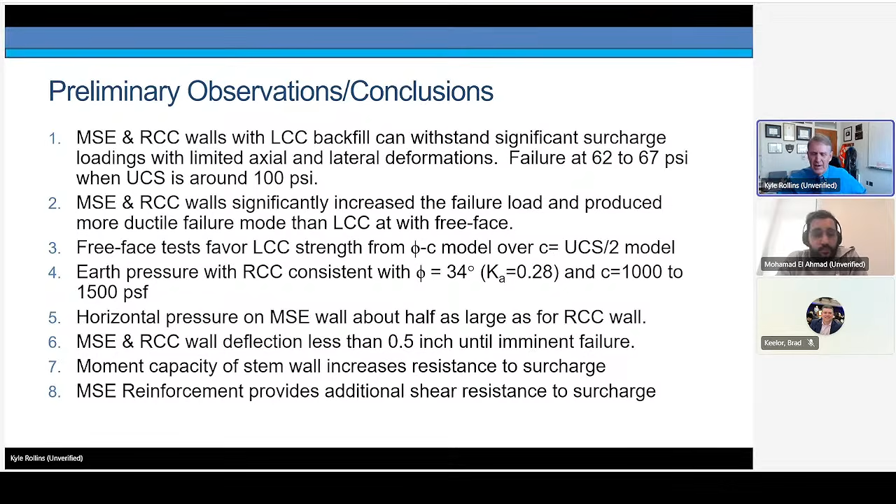The horizontal pressures on the MSE wall were about half as large as those for the RCC wall because the reinforcements are picking up load. Wall deflections for both the MSE and the RCC wall were less than about half an inch until we were getting very close to failure. The moment capacity of the stem wall is increasing the resistance to surcharge and can be accounted for by using the moment capacity of the stem. The MSE reinforcements themselves provide the additional shear resistance to surcharge, and you can account for their effect using slope stability techniques.

Lastly, some preliminary observations and conclusions for design. The moment capacity of the stem wall increases the LCC resistance to surcharge load, and we can use the moment capacity from the ACI code to account for that increased resistance. The MSE reinforcement design in the LCC can be determined using slope stability methods. Of course, you could do the regular pullout testing, but to see if the lengths and spacing are acceptable, you could use a slope stability model using the F-star versus pressure curves that have been developed in this study, along with slope stability methods such as those in UTEXAS.

Having the steel reinforcement in the RCC stem and the MSE walls themselves results in a much more ductile failure mechanism, in contrast to the brittle failure that occurred with unreinforced walls at a free face. So we think it's worth the money to put the reinforcements in place to lead to ductile behavior rather than some catastrophic failure in unreinforced material.